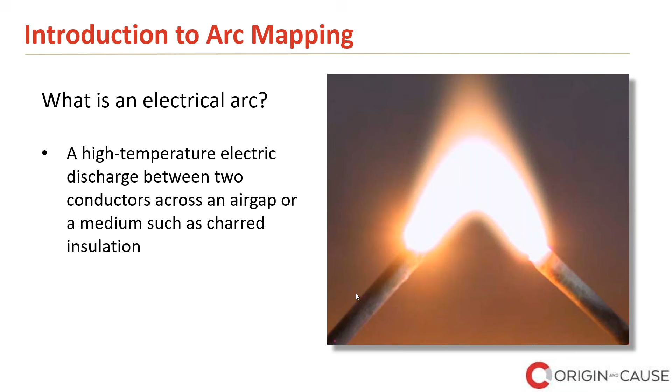Now, as fire investigators at a fire scene, this is not what we're looking for. We're not looking for these bright lights and sparks and such. What we're looking for is the damage to the wires that's left behind at the fire scene. And what does that look like?

Here's the after-effects of electrical arcing. You get small divots, you get beads of copper on the wires. These two wires have actually arc severed, and what happens is the amount of energy caused the wires to melt. You get this melted globule of copper on the end. And if you look closely, you see all these little divots and balls of copper on the wires. Each one of those represents an arc. So there was a lot of violent energy being expelled out of here, sparks and light and bright flashes.

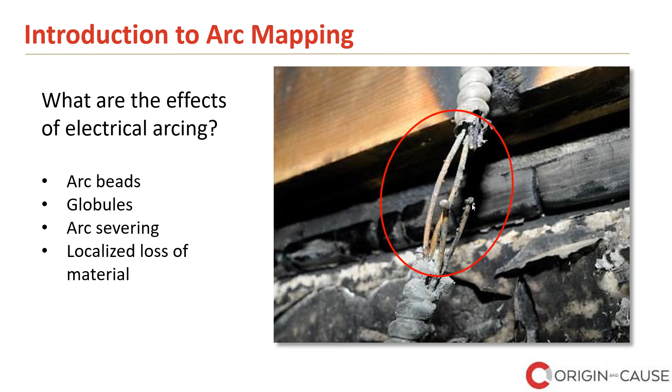So this is the kind of damage we, as investigators, are looking for on the electrical wiring within a fire scene to help us establish an origin of the fire. So let's go back a little bit and look at investigation methodology and how electrical arcing becomes a part of that toolbox.

So terminology: when we say we're doing a fire investigation, we're doing an origin and cause investigation. I specify origin because it's typically the first thing we do, and cause comes afterwards. This is because we need to find the origin of the fire, where the fire started, in order for us to find the cause. So origin is, you probably hear us talk about that in our reports, and that is the general location where the fire or explosion began.

Now, you may also hear us talk about area of origin. That's defined as the structure, or part of the structure, or general geographic location within the fire scene in which the point of origin of a fire or explosion is reasonably believed to have begun. So area of origin is sort of a general term that says the fire started in that part of the building. Now, point of origin...

The point of origin is the exact physical location within the area of origin where the heat source, or the ignition source, and the fuel interacted, resulting in the fire or explosion. It is at that point of origin that we would expect to find the cause of that fire, the ignition source, and why the fire started.

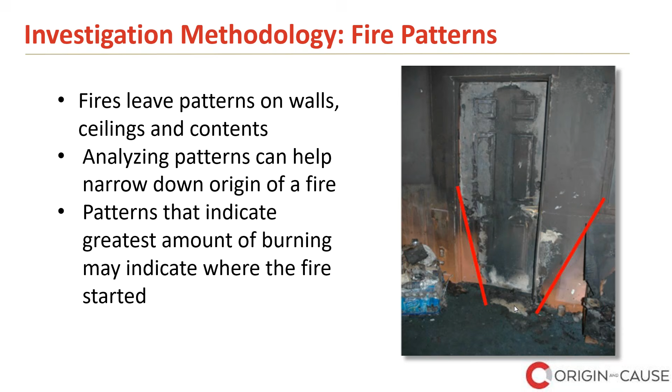Let's look at another one. Here we have a pretty well-defined fire pattern. We've got a V, another V fire pattern pointing to the side of the couch that's against the wall with the door.

Sometimes when I'm presenting this to a live audience or seminar, I'll ask whether they think the door was open or closed during this fire. Think about that. When you look at that door, that fire pattern doesn't really stretch up along the door, does it? So I would say that door was probably open during the fire. That's why we don't have that defined burning up the door that would connect the fire patterns together.

There are about 80 defined fire patterns, including the V fire pattern. The V fire pattern is kind of the classic one that people talk about, but there are 80 of them.

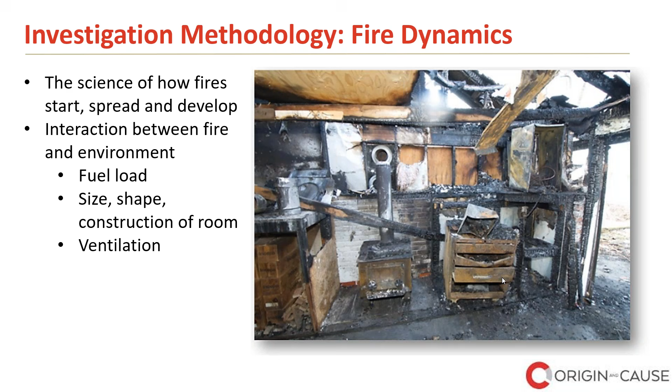This next sequence of slides is just a depiction, taken from NFPA 921, the Guide for Fire and Explosion Investigations. I'm going to illustrate how initially fire patterns are very useful, but when you get full room involvement, those fire patterns are going to be masked and may actually be destroyed in the fire. So here you have a fire that starts on an upholstered chair in the corner of a room.

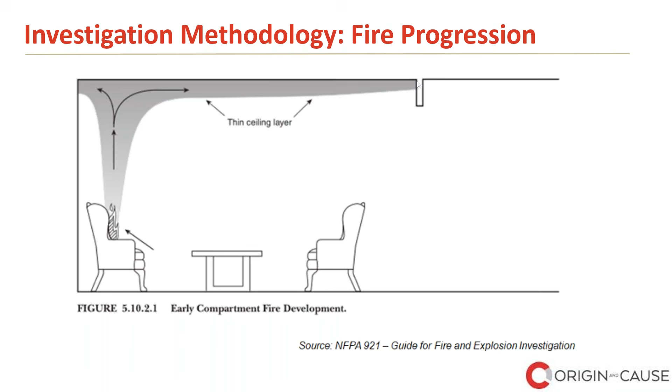As the fire burns, it creates hot gases that rise and collect at ceiling level. Those hot gases start to descend and spread along the ceiling until they hit an obstruction, and eventually they may pass that obstruction and spread to another room.

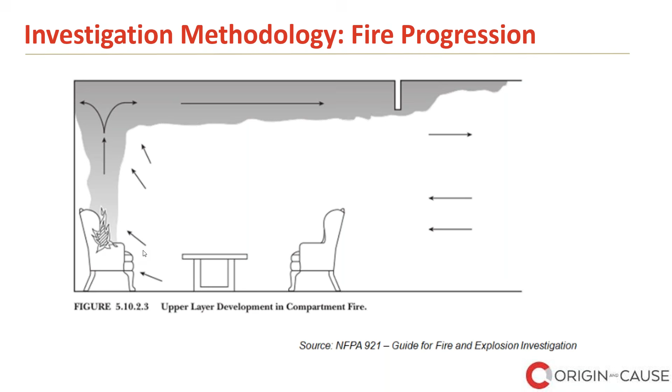As the fire burns, air gets entrained into the room from any openings, windows or doors, and this is where you get all your fire patterns formed. If this fire was put out right now, you would see a plume fire pattern on the wall, or it may form a V fire pattern, and you're probably going to be able to find where that fire started on the upholstered chair just by consumption and fire patterns alone.

Now let's say that fire continues to burn. It adds energy to the room, and to the heat layer or smoke layer that collects at the top of the room. Eventually, as that smoke layer descends, it's full of heat energy, which radiates down to all the combustibles in the room, preheating them. You still get air entrainment into the room, providing combustion air for that fire to continue burning and generating hot gases and releasing heat energy.

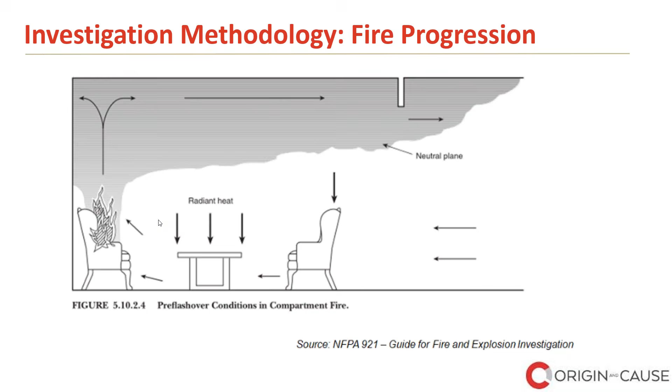Now, there's going to be a transition during the fire in the room. That transition is called full room involvement, or flashover. That's when the hot gas layer has descended to the point where it ignites all the other combustibles, and they start to burn, producing other fire patterns on the walls from these other fuel packages.

This transition of full room involvement, flashover, is measured at about 590 Celsius in the room. So that's a pretty hot room.

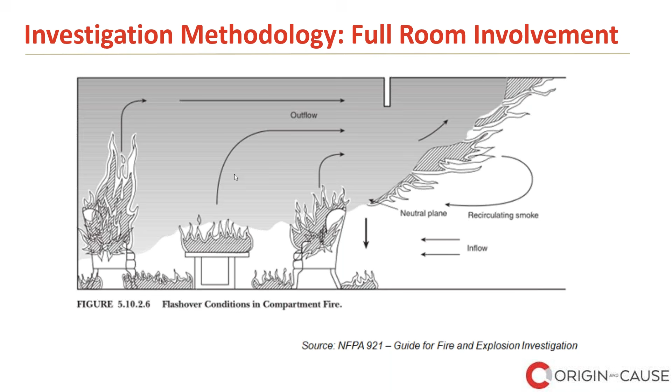At this point, past full room involvement and past flashover, all the combustibles are burning, and the fire transitions from being a fuel-controlled fire to becoming a ventilation-controlled fire. That means we're not getting air entrainment into the room anymore where the fire originally started, and the fire goes out due to lack of air - ergo, ventilation controlled fire.

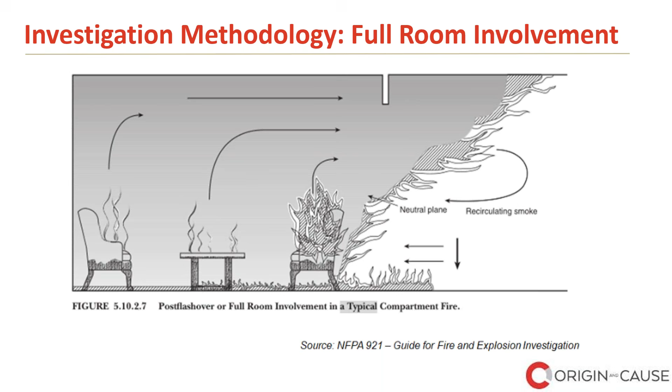The fire may spread out of the room and to other rooms, and you can see now that we have lost our initial fire pattern. It's going to be much harder to determine the fire origin just based on fire patterns alone. This is why, as fire investigators, we need other tools in the tool chest.

So this is what full room involvement, or post-flashover fire, looks like. This is where the fire was intense enough to burn everything in the room. Full room involvement will mask the initial fire patterns that would present a possible fire origin in the room. So what do we do in this case?

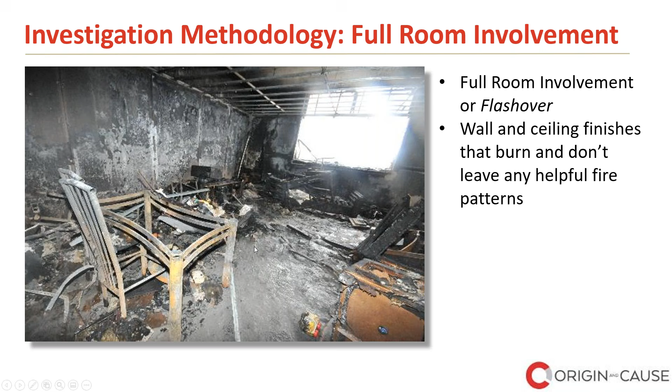Let's look at how arc mapping can help us in narrowing down the origin of the fire.

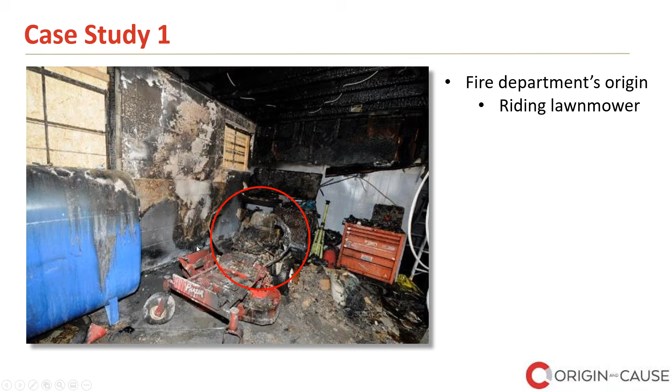Here's another view of that same area. Looking at this, it sort of forms a V - it's a V fire pattern. So could this be the fire origin? It could be.

This is our lowest burning in the area. What about this area? We got some low burning here that appears to go kind of behind the fuel oil tank. And we see that we have some electrical wiring through the ceiling right here, and that wiring continues along here and then down to some area behind the tank.

Now, part of arc mapping is documenting the electrical panel. In this case, when the electrical panel was documented, the circuit that fed this cable was tripped. So we can assume that this arcing, or possibly another area of arcing on this branch circuit, caused the circuit breaker to trip and freeze this fire pattern in time for us to look at.

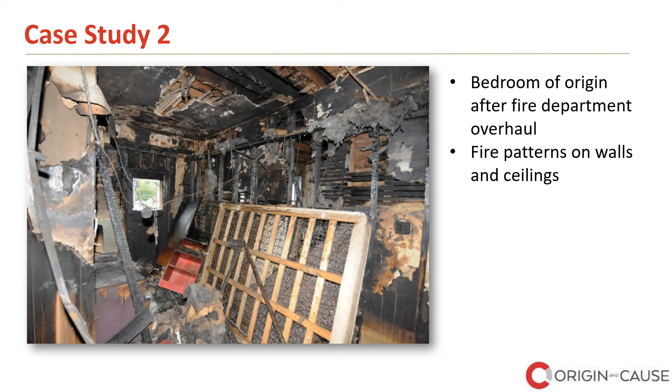This is another view. The mattress is over here. This is looking to an exit door out of the bedroom, and we can see that the fire patterns are actually higher up on the wall.

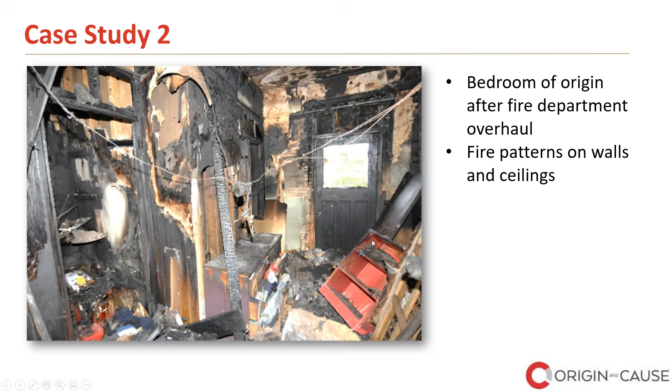These upper fire patterns are actually formed by that ceiling layer, the hot gas layer that I spoke about before. We can see that's all kind of higher up than what we saw where that mattress was in the previous photograph. This is looking back towards the entry door into the bedroom.

And again, you can see that hot gas layer caused some fire patterns on the walls.

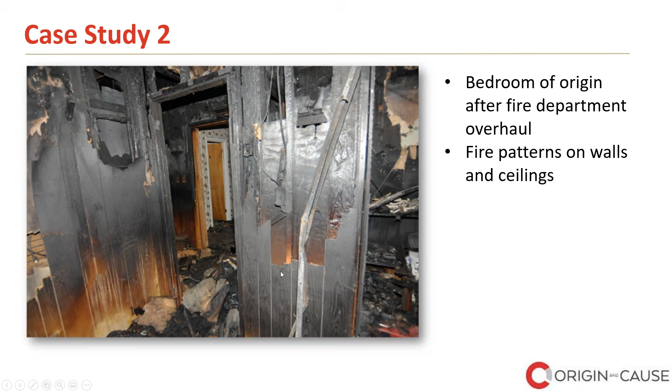Not as low as where that mattress was located. So this is the view after excavation of the room and the fire debris.

We can see that the wall finish is actually made from plywood paneling. Plywood paneling burns pretty easily, so in this case it's actually beneficial for us because the plywood paneling would have burnt away pretty quick in the fire and exposed some of this electrical branch circuit wiring for us to use in our arc mapping.

And here you can see that we sort of have a V fire pattern, and it's pointing down probably towards some fuel, and possibly we might find a cause in this area.

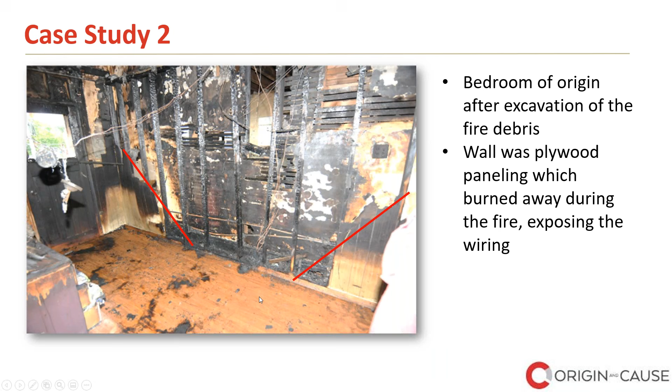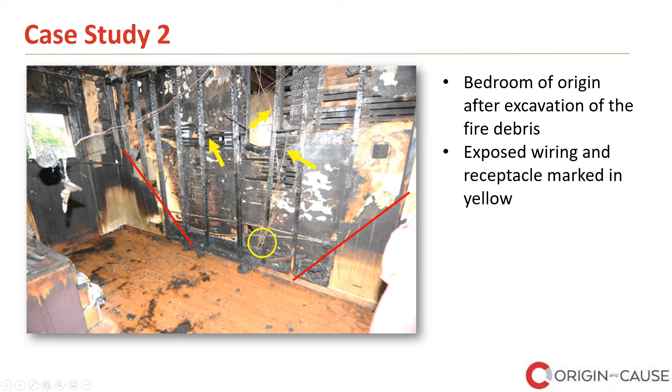So let's look at that receptacle. It actually looks pretty good. There's no apparent failures. Doesn't look like anything's plugged in right now. We don't know if there was anything plugged in before the fire. You can see all the insulation has been burnt off the wires, and the copper wires from the electrical cables have been exposed.

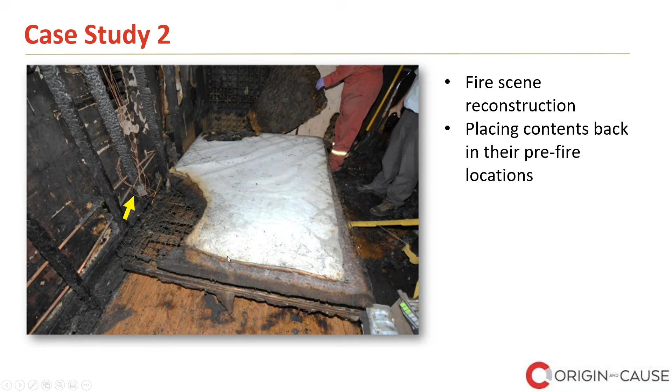Now we continue in our fire scene reconstruction. We put the remains of the mattress - this is the springs out of the mattress. You can see that all the stuffing and the wrap around the mattress has been burnt away, leaving behind just the springs. Again, that's where the location of the electrical receptacle is.

And you can see that the fire patterns kind of correspond with the mattress being in this area, because when you look below the mattress, you've got less burning. Again, reference the duplex receptacle marked by the yellow arrow.

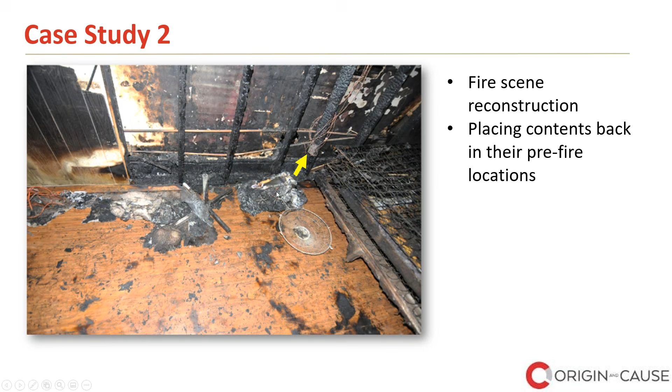This piece of fire debris is actually a plastic shelving unit that had various electronic components stored in it. There's some wiring from the fan itself that collapsed down on top of it.

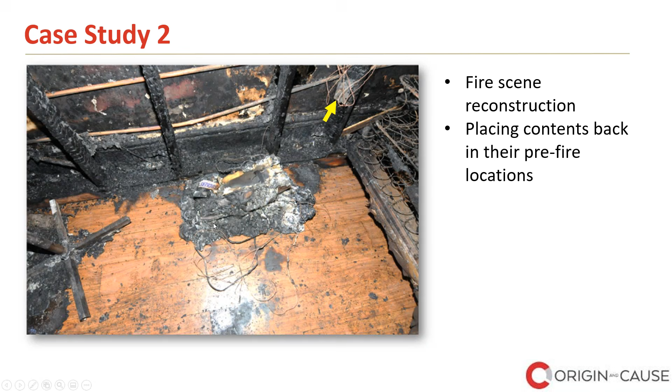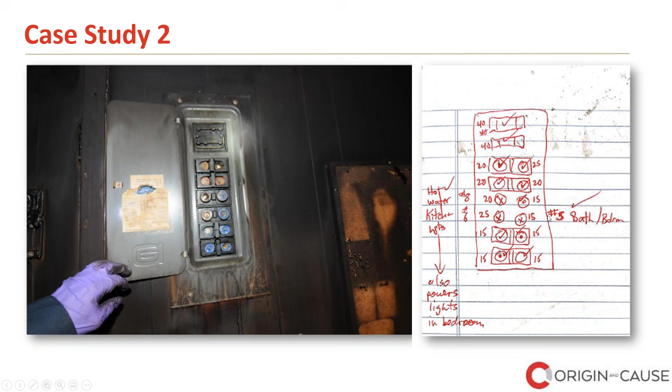So we've got a hot water circuit, which is circuit number 8. We've got the kitchen lights, which is circuit number 6. And we have circuit number 5, the bath and bedroom.

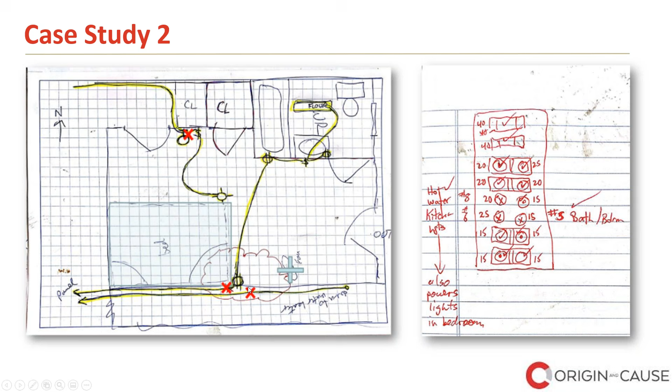Now one would say, okay, good exercise, but you've got two areas of arcing here and one here, so which one indicates the origin? Well, you have to take that in perspective. Let's have a look at the locations of the arcing here and here. In this case, these two areas of arcing are sort of where that area of bite mark was in that mattress, and I usually mark the areas of arcing with an orange ribbon, so we see that right here. That sort of makes sense.

If the fire started here, the mattress would burn, and then the hot gases of the fire would burn through the wall finish and then ignite the insulated wires and cause electrical arcing in these areas.

So what about this one over here? Well, we see that it's actually at the ceiling level, at a sconce light fixture that's at the ceiling level. Here's the entrance into the room, and we have arcing over here on the exposed wiring. We can easily explain that because this area of arcing is actually at the ceiling level.

As the fire builds, it forms that hot gas layer, and as that hot gas layer starts accumulating, it's full of heat energy, and just that heat energy causes that insulation to burn and causes that electrical arcing to trip that circuit protection. So we can easily explain that this is not the origin location arcing, and that this likely is.

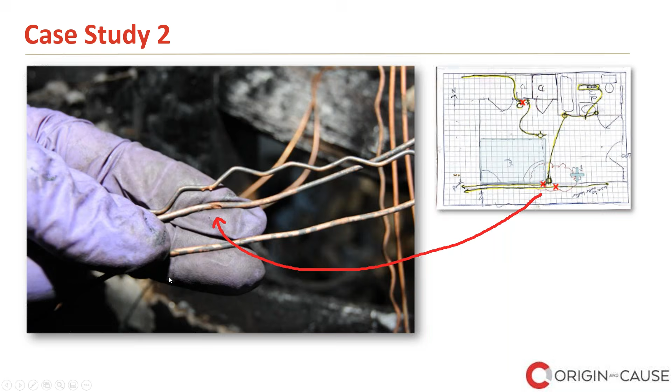So we continue our investigation. We found that piece of fire debris, which was the melted shelf, and we need to look in that wiring that's embedded in that plastic to see whether there's any other evidence of electrical arcing activity. While we're looking at this, we actually flip it over and find the remains of that electric motor for the oscillating fan that we found in that area of the bedroom.

We do a quick evaluation. We see that the fan motor's actually got a lot of unmelted, it's melted plastic around it, but it actually didn't burn the plastic away, and you have some plastic on the shaft. So again, we're thinking probably the fire was not caused by the electric fan, but we still need to look at the wiring. Some of the wiring is embedded in the plastic, so we need to somehow get access to it.

There's no arcing evident on the exposed wiring. These are actually the power cord blades. Because the insulation burnt off, the blades have separated, but we don't see any arcing on the wiring, and we don't see any damage on the blades themselves. But we still want to make sure that we don't have any arcing embedded in that plastic material.

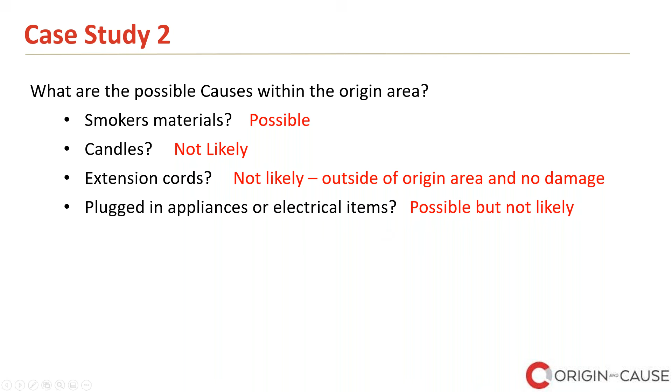So we take that debris back to our laboratory and shoot some x-rays through it. Later on, we examine the x-rays.

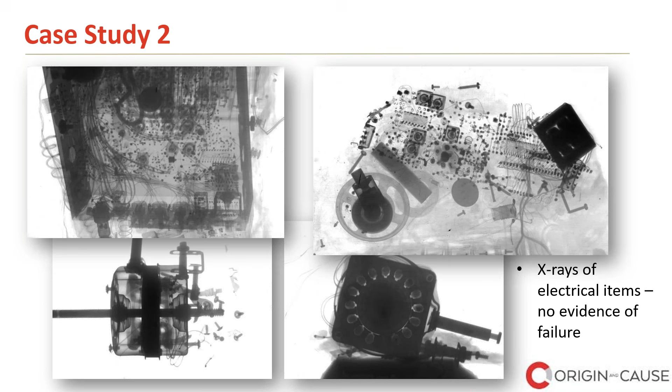So we put all the evidence together and balance of probabilities, it doesn't look like we had any evidence of failure with any of the electrical items. Based on the arc mapping exercise, we established, along with the fire patterns agreeing with our arc mapping exercise, a decent conclusion may be that this fire is undetermined, or depending on which way the evidence points, it may be related to smokers' materials.

So there are some limitations to arc mapping. I've pointed to what the benefits are, and some of the benefits of arc mapping as well when you're examining appliances. When you find appliances, let's say you're doing an arc mapping exercise in a kitchen, you may find appliances that have been burnt.

Let's say they're on a counter. If you examine that appliance and the only area of electrical arcing you have is on the power cord to that appliance, you could safely hypothesize that the fire spread to the appliance.

Now, if you do examine that appliance and you found electrical arcing inside the appliance, let's say on a component or internal wiring, then you'll want to have a closer look at that appliance.

Again, benefits of electrical arc mapping is you could do that on a much smaller scale with appliances. You can do it with vehicles as well. It's a big part of vehicle fire investigation, looking at the primary wiring connected to the battery between the alternator, starter, battery, and the ECM, where you find and document the electrical arcing. You will probably be close to or in the area of origin.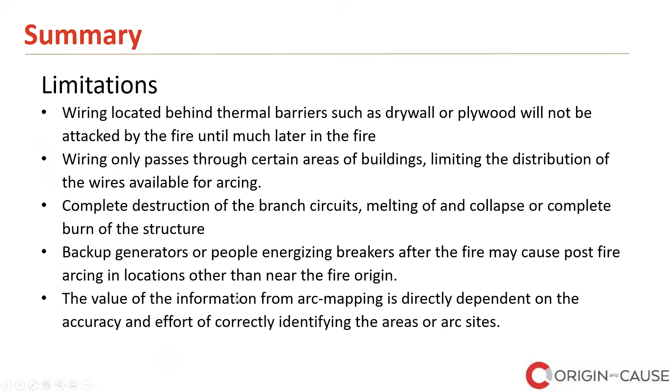First question: in the first burn cell, was the wire exposed or under sheetrock? Are you talking about the ATF exercise? Is that what you're saying? I believe so. It says the first burn cell. Yeah, well, this burn cell, the wires are all exposed, so there's no sheetrock there.

They actually run the wires under the ceiling. And again, like I said, it's not representative of normal conditions in a typical residential house. But it is for the purpose of illustrating how we can use arc mapping. So really, it's not a realistic exercise, but just a point to how we can do it. These wires are at ceiling level, exposed underneath the ceiling.

Great. Hopefully that answered that question.

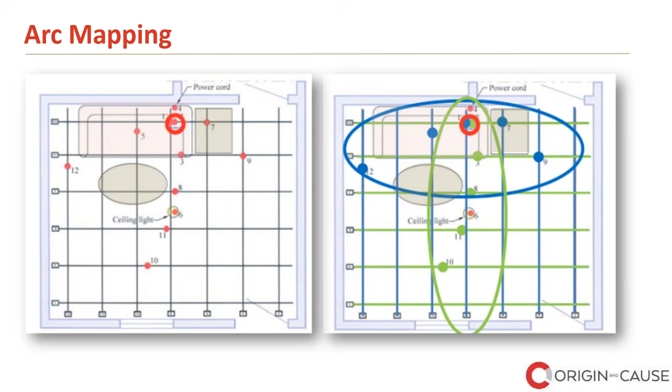Thank you, Val. For case study number 1, having decided that the clamshell connector is the more probable area or point of fire origin, can you further determine forensically if the internals of the clamshell connector had resulted in some kind of electrical fault that would have led to the heat source of the fire? How do you forensically do that?

So typically at a fire scene, if you find this, you probably want to save it as evidence and take it back to the lab. At the lab, we can typically shoot X-rays through it and find areas of electrical arcing activity. Again, you're using arc mapping as your exercise. So your first failure would have been here, and probably did not have enough energy to trip the circuit protection. The fire spread up to that area above, and finally the circuit protection activated.

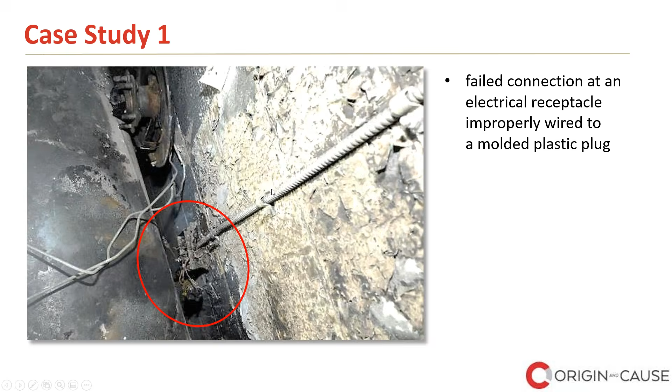But in this case, when we take this back to the lab, this is a very defined failure point. You can see pretty undamaged plastic over here and totally destroyed plastic over here. So this piques the interest of the investigator to look further. Typically what we'd find at the lab, once we took all the char away, is these wires actually came out of here, and you can see somebody hardwired them in, which is poor code practice. You wouldn't do that.

But what we'd probably find is areas of localized melting on these jaws that connect the male and female clamshell receptacles together. That's just to prove this is where the failure happened, and that resulted in the fire. Again, I'm not sure if I explained that properly, but hopefully if somebody has more questions, please go ahead and ask. Sure.

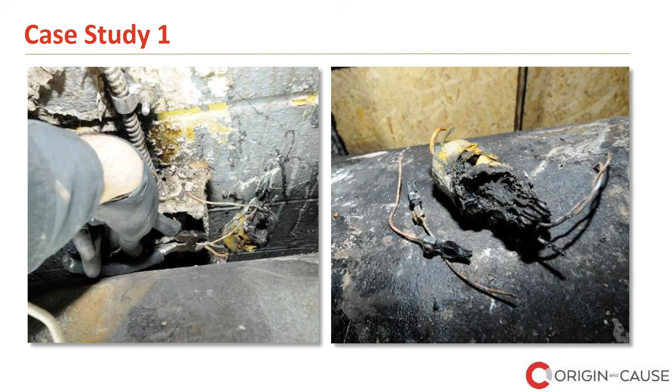The next question is, for case study number 2, how long did it take you to trace the different branch circuits? What tools did you use to trace the wires to the respective fuses or breakers? Okay, so you can see the diagram.

This one kind of came around and came back to the panel. Some tools that we use - it's called a circuit tracer. At the fuse panel or the circuit you want to trace back to the panel, you have to find good wires. You may cut the circuit where the wires become good again, and you attach what's called a toner - a little electronic device that injects a tone into the circuit.

Then you go back to the electrical panel and use a toner detector, a little wand that beeps, and the beeping gets louder when you pass over the affected circuit. So that's one way of doing it. Now that's not 100% - if all your wires are shorted or compromised somewhere else, the tone isn't going to get through to the panel.

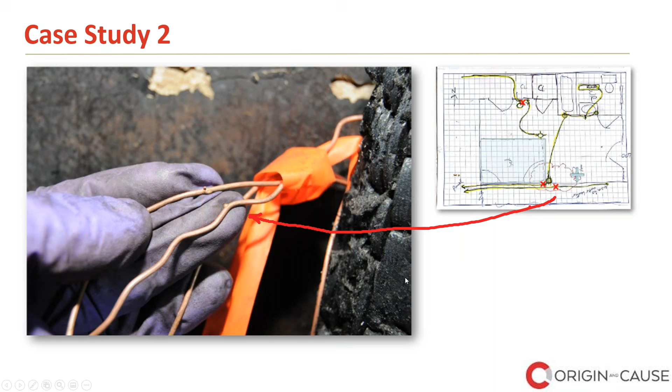Okay great, 2 questions about case study number 1. The first question is, which is the point of origin - the plug or the arc beaded sheathed cable? The second question: the fire department determined the area of origin was at the lawnmower. What caused the fire pattern to show the low point of burning in this area, the drop down with the wire? What caused the extension of the fire up the concrete wall?

That also relates to another question we received: how do you differentiate what you observe on the electrical cable as being arcing versus melted due to the fire? Well, that's the quandary of the fire investigator. You have to take everything into perspective, and the question always is: is it causal arcing, or is it origin arcing, or effect arcing?